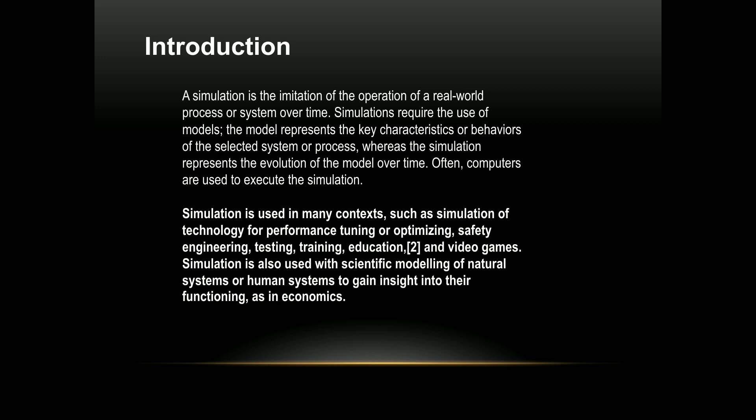Simulation can be used to show the eventual real effects of alternative conditions and courses of action. Simulation is also used when the real system cannot be engaged, because it may not be accessible, or it may be dangerous or unacceptable to engage, or it is being designed but not yet built, or it may simply not exist.

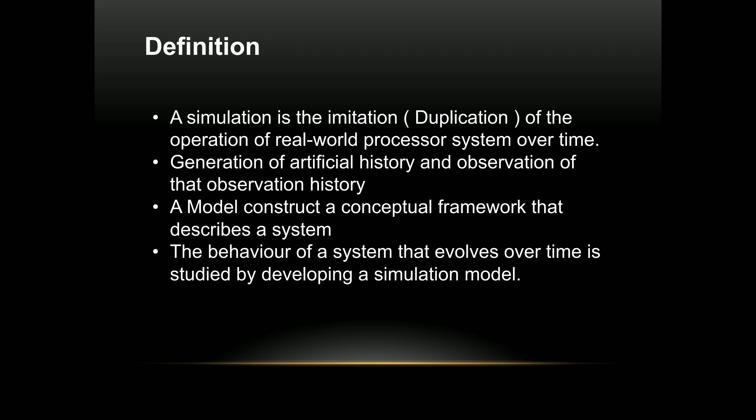Definition. A simulation is the imitation, duplication of the operation of real-world process or systems over time, generation of artificial history and observation of the artificial history. A model constructs a conceptual framework that describes a system. The behavior of a system that evolves over time is studied by developing a simulation model. The model takes a set of expressed assumptions, mathematical, logical, symbolic relationships between the entities. The ultimate goal of modeling is simulation of systems and plant performance.

Abstract. Modern production processes in chemical, pharmaceutical, and biological industries are characterized by complex process structures, which consist of different apparatuses and process steps. Modeling the entire process requires simulating all units altogether while taking into account interconnections between them. Nevertheless, in the area of solids processing, there is nowadays an unfilled gap from the side of computer support of process modeling allowing effective optimization and prediction of the behavior of the whole plant.

The paper presents a tool for flowsheet simulation, which allows the simulation of the stationary behavior of complex processes dealing with solids and its extension toward dynamic modeling. Also, a new simulation concept is proposed on the basis of the multiscale approach; macroscale flowsheet simulation is performed with the help of the SolidSim system. Parameters for the macro models in SolidSim are predicted by microscale simulation. The models for the two scales are then coupled by interscale communication laws. Application of the proposed modeling concept is shown by an example of fluidized bed granulation.

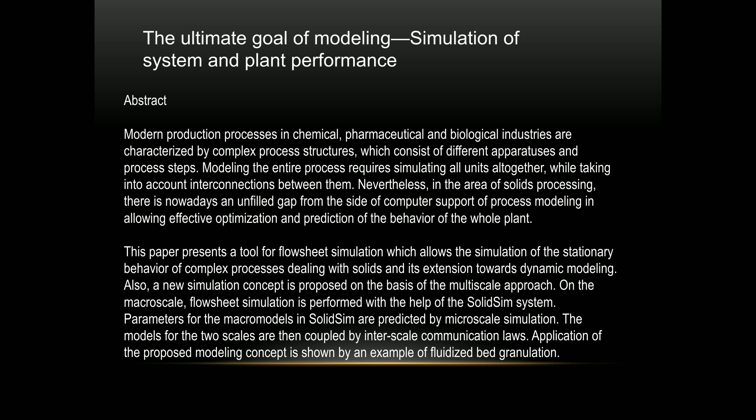Graphical abstract. The simulation of the entire process of solids processing on the basis of a multi-scale approach. Flowsheet simulation is performed at macro scale with the help of the SolidSim system, which allows simulation of stationary behavior of complex processes dealing with solids and its extension toward dynamic modeling. Parameters for the macro models are predicted by physically based micro scale simulation, with the models at the two scales coupled by interscale communication laws.

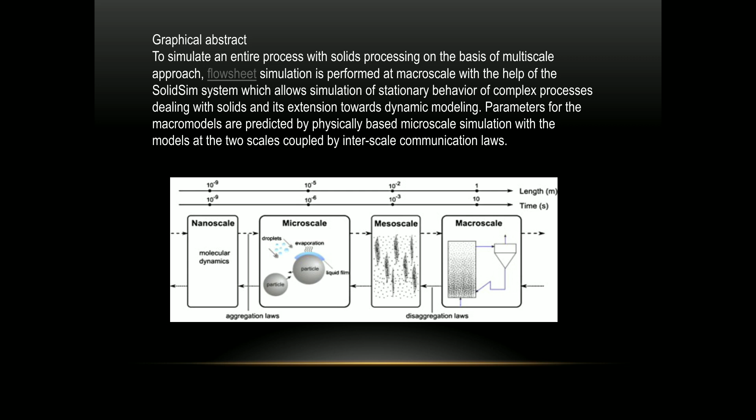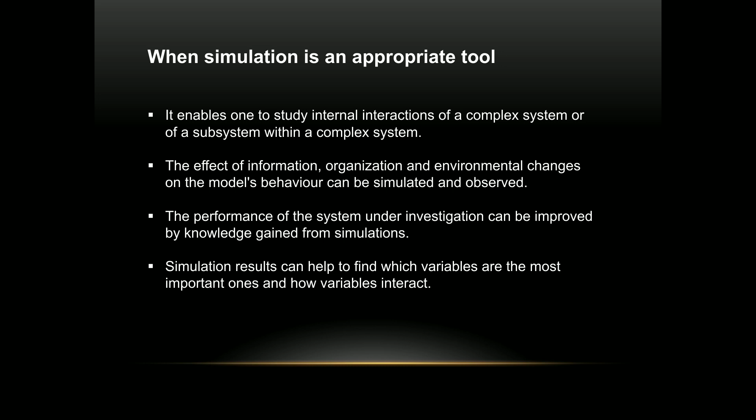When simulation is an appropriate tool: it enables one to study internal interactions of a complex system or a subsystem within a complex system. The effects of informational, organizational, and environmental changes on the model's behavior can be simulated and observed. The performance of the systems under investigation can be improved by knowledge gained from simulations. Simulation results can help to find which variables are the most important ones and how variables interact. It can be used as a learning tool. It can be used to verify analytical solutions.

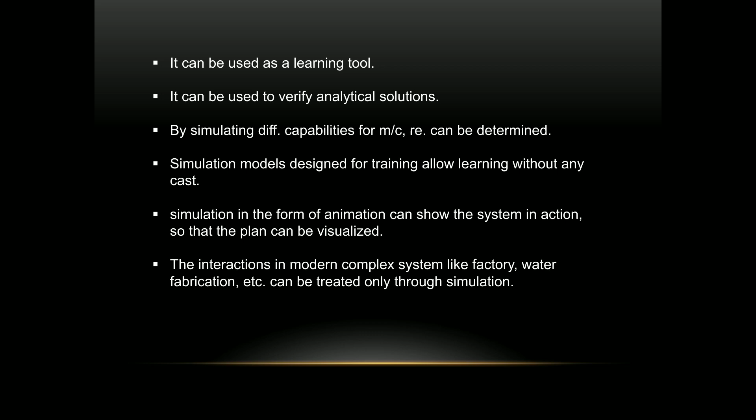By simulating, the capabilities for machines can be determined. Simulation models designed for training allow learning without any cost. Simulation in the form of animation can show the system in action so that the plan can be visualized. The interactions in modern complex systems like factory, wafer fabrication, etc. can be treated only through simulation.

When simulation is not an appropriate tool: the problem is solvable by common sense. The problem can be solved mathematically. Direct experiments are easier. Simulation costs exceed the savings. Simulation requires time which is not available. No data is available and simulation needs data. Simulation cannot be verified and validated. System behavior is too complex or unknown.

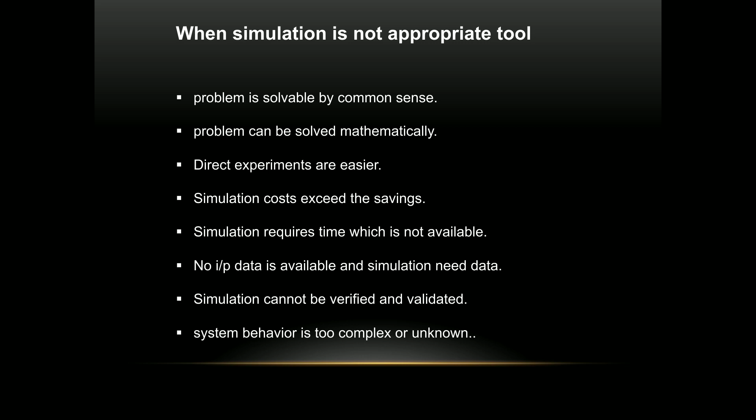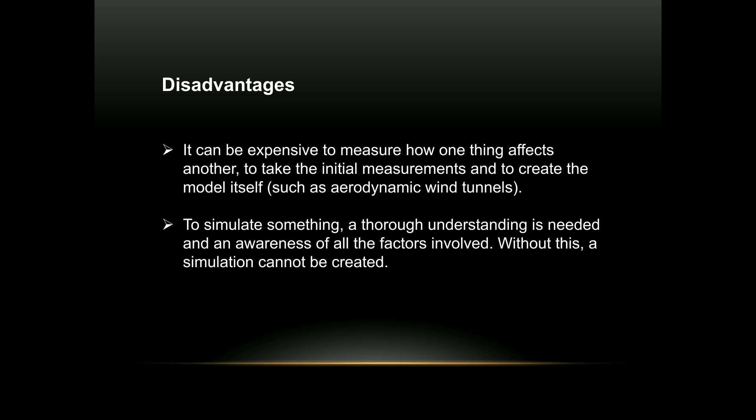Disadvantages: it can be expensive to measure how one thing affects another, to take the initial measurements and to create the model itself, such as aerodynamic wind tunnels. To simulate something, a thorough understanding is needed and an awareness of all the factors involved. Without this, a simulation cannot be created.

Areas of simulation. Logistics simulation: optimize complex and dynamic logistics processes with simulation. Simulation in production, production planning, emulation, planning of machine scheduling, station simulation, personnel simulation, supply chain simulation.

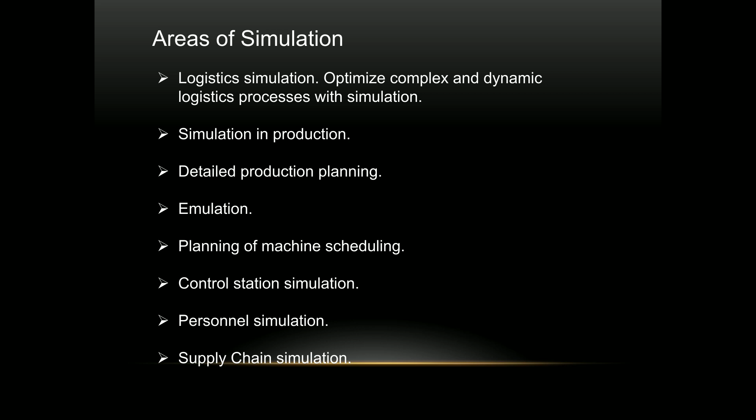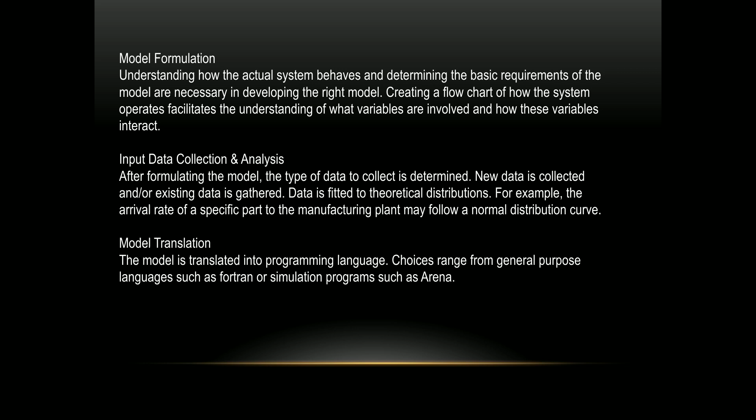Steps in simulation. Problem definition, project planning, system definition, model formulation, input data collection and analysis, model verification and validation, experimentation and analysis, documentation and implementation.

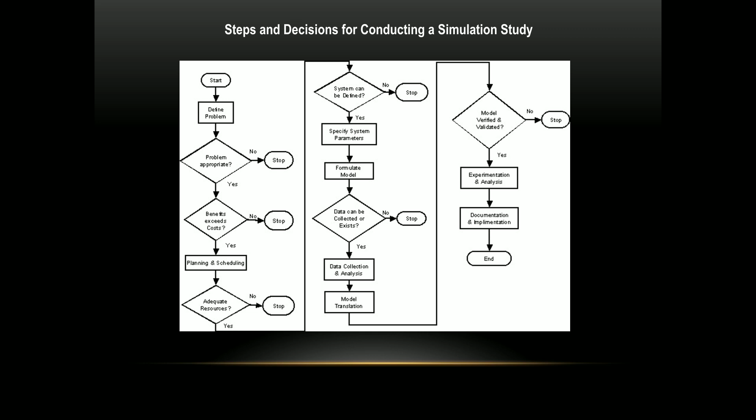Steps and decisions for conducting a simulation study. Start, define problem, is the problem appropriate, stop, do benefits exceed cost, planning and scheduling, adequate resources. System definition, specify system parameters, formulate model. Data collection and analysis, model translation. Model verified and validated, experimentation and analysis, documentation and implementation.